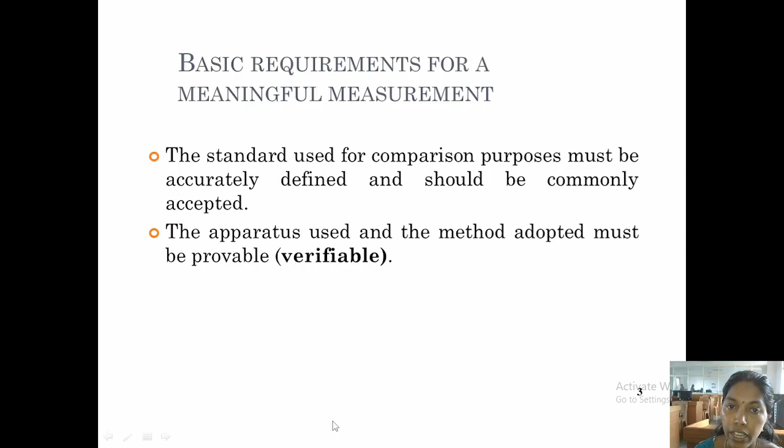The basic requirement for the meaningful measurement is we have one standard and the method to acquire the value. The two things are there. The standard should be commonly accepted and accurately defined. That is the main requirement for the standard. And for the method to acquire the particular value, the method we use to get the value should be acceptable and provable. That is very, very important.

Why we need this measurement? Why we are very interested in measurement and instrumentation? The main objective of the engineering domain is designing equipment to get the system done a particular job, or controlling some process so that we get the maximum of yield. For all these objectives, we need some values.

We need the status of the system, or we need what is the current performance, so that we can design, we can understand the system, and we can introduce a certain new modification so that the system will perform as we required. So the measurement is irrespective of any domain. The measurement and instrumentation is very common to all the engineering disciplines.

Okay, what are the methods we used for the measurement? To measure, we use the direct method and indirect method. The direct method is we want to measure a current. We measure a current directly. If we measure a current directly, and the current is the thing we want to measure as well, then this is a direct method. In indirect method, we want to measure a strain, but we measure a resistance change, or we measure a voltage change, and then we convert to the strain. Then it is called the indirect method.

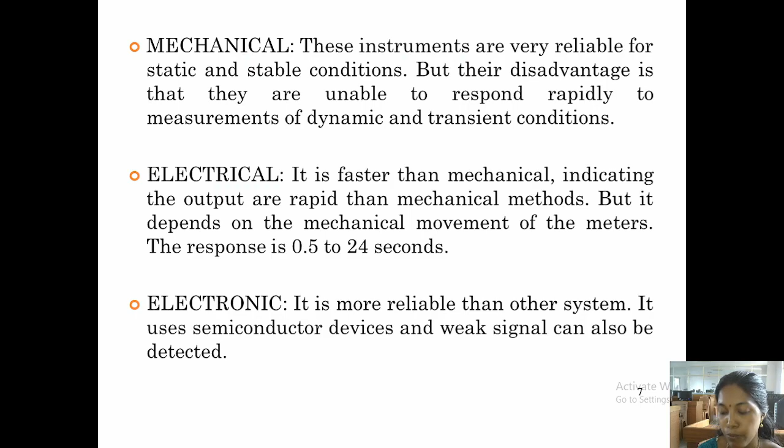Okay. Also, the instruments are classified into absolute instrument and secondary instrument. The absolute instruments give the magnitude of the quantity under the measurement in terms of physical constants of the instrument. While in case of secondary instrument, these instruments are calibrated by comparison with the absolute instrument which has already been calibrated.

Okay. Then next, depending on the functions of instrument, the measuring systems are classified into three. They are indicating function, recording function, controlling function. If in a room we have a thermometer which indicates the current temperature of the room, then that device comes under the indicating function. Also the clock, which is an indicating instrument, shows the current time, nothing else. These devices come under indicating function.

The recording function: say, for example, the energy meter in our home. They indicate the value as well as record the value, so that we can measure how much electricity we have consumed. The third type of instruments have a controlling function. They are used to provide the value for the actuating devices.

Next, based on the pointer movement, the instruments are classified as deflection type instruments and null type instruments. In a null type instrument, when we get the correct value or when we get the balance, the pointer comes to the zero position. In a deflection type instrument, it shows the value of the quantity we want to measure.

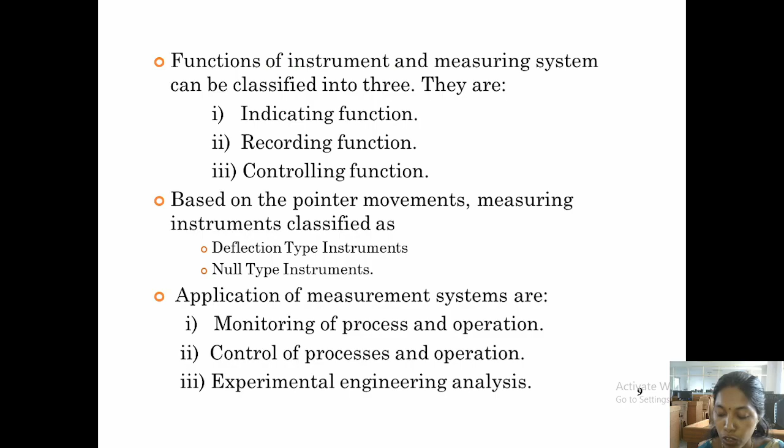The applications of measurement systems are: they are used to monitor processes and operations, they control processes, and they are also used for experimental engineering analysis. In experimental engineering analysis, if a parameter is very new to us, or new engineering concepts are evolving, the measuring instruments also evolve for that particular purpose; they come under experimental engineering analysis.

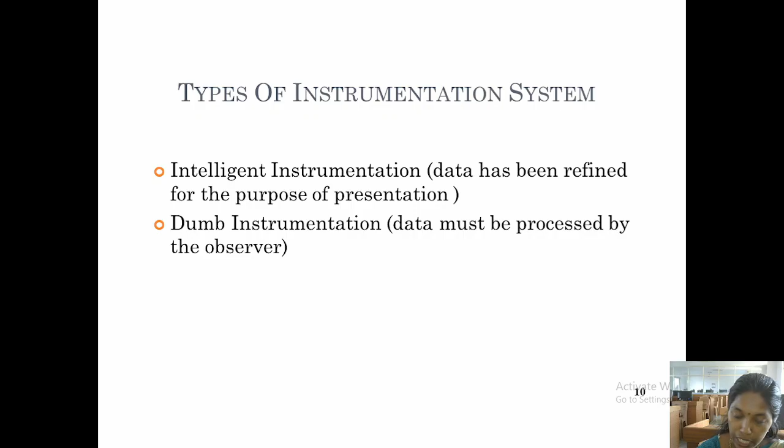The instrumentation system is further classified, based on applicability and purpose, as intelligent instruments and dumb instruments. In an intelligent instrument, the data we are acquiring is refined for the purpose of presentation itself. The device itself presents the data in the manner we want. In a dumb instrument, the instrument only provides the data to the observer. The observer has to prepare his or her presentation, because the data are very raw.

A very important understanding of the instrumentation system comes with its block diagram. For all measuring instruments, these 5 functional blocks are either merged or separately available. First, the primary sensing element is the most important element in the measurement system. This part detects the signal or senses the variable we want to measure. After the primary sensing element comes the variable conversion element. Next is the variable manipulation element, the data transmission element, and the data presentation element.

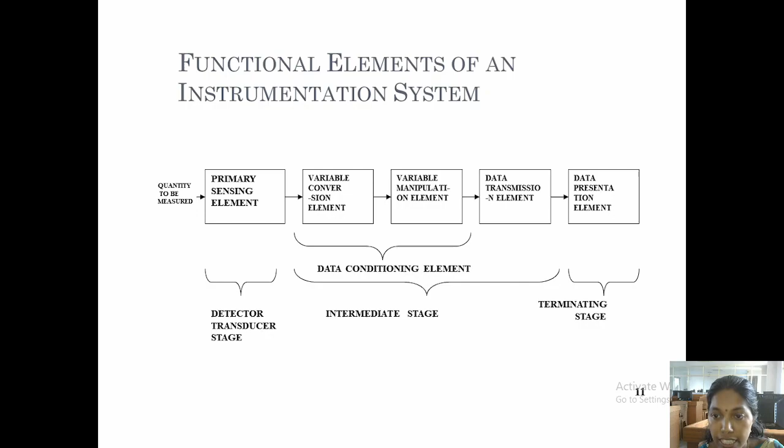These 5 elements are classified into 3 stages. First, the primary sensing element is the detector and transducer stage. Variable conversion, variable manipulation, and data transmission elements come under the intermediate stage, and the data presentation element is the terminating stage. First, the primary sensing element: the quantity under measurement makes its first contact with the primary sensing element. It's the initial stage, like a reception.

Next, the variable conversion element. It converts the output of the primary sensing element into a suitable form while preserving the information in the original form. In the data presentation element, the data is presented so that the observer can understand the overall process or the requirement of the observer. The requirement of the observer is met by the data presentation element.

If the observer wants to know the current status, then the data presentation element shows the current status only. If the observer wants to see the history of a particular value, then the data presentation element will be a chart or graph, so that we can see how the variable changes, and vice versa.

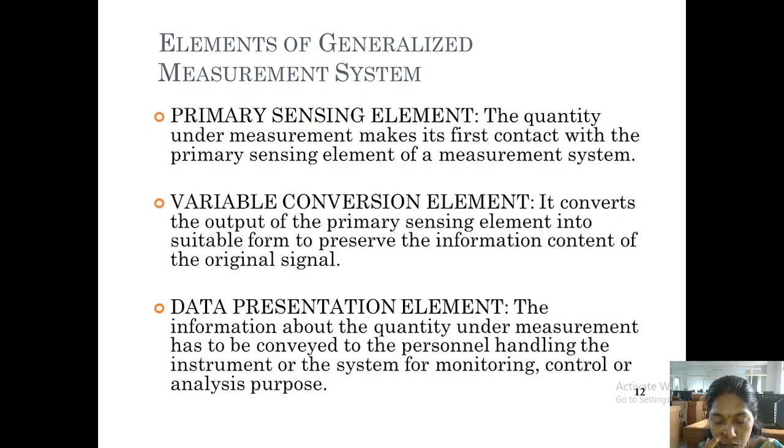Next, these instruments have some static and dynamic characteristics. Examples of static characteristics are accuracy, drift, dead zone, static error, sensitivity, reproducibility, static correction, scale range, scale span, noise, dead time, hysteresis, and linearity. One by one we will see them next.

Accuracy. It is the closeness with which the instrument reading approaches the true value of the quantity being measured. Accuracy is mostly expressed in terms of error. So accuracy is how close the value gets to the true value. If the device is very accurate, the actual value gets displayed in the instrument. When we get a very accurate device, we get the actual result.

Accuracy is defined in terms of error, as we mentioned. It has a true value. True value means the actual value of the quantity we want to measure present at a particular instant. How is the true value measured? The true value is mostly determined theoretically. The next is sensitivity. Sensitivity is defined as the ratio of output response to input.

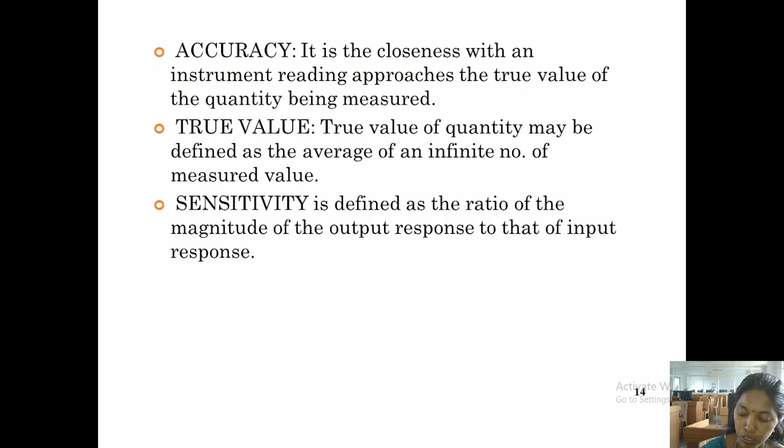Next is static error. Error is the difference between measured value and true value. Here Am is the measured quantity at the particular instant, and At is the true value of the quantity at the particular instant. When we define error in this way, it is called absolute static error.

Next, in measuring instruments, we see the scale range. Scale range is, in a display or digital instrument, the minimum value it can show and the maximum value it can show. For example, in a digital meter with 3 digit spaces, what is the minimum value it can express? It can express 000 as the minimum value, and the maximum value will be 999.

Next, scale span. Scale span is the difference between the maximum value it can show and the minimum value. In the above example, the maximum value is 999 and the minimum value is 000. What is the scale span? Scale span is 999 minus 0, which is 999. Next, the term reproducibility.

Reproducibility is specified in terms of scale reading over a given period of time. The next is drift. Drift is an undesirable quantity in an instrument, because if we have drift, before we start using the instrument we have to adjust the drift, or we have to account for the drift already in the instrument. Drift is of 3 types: zero drift, span drift, and zonal drift.

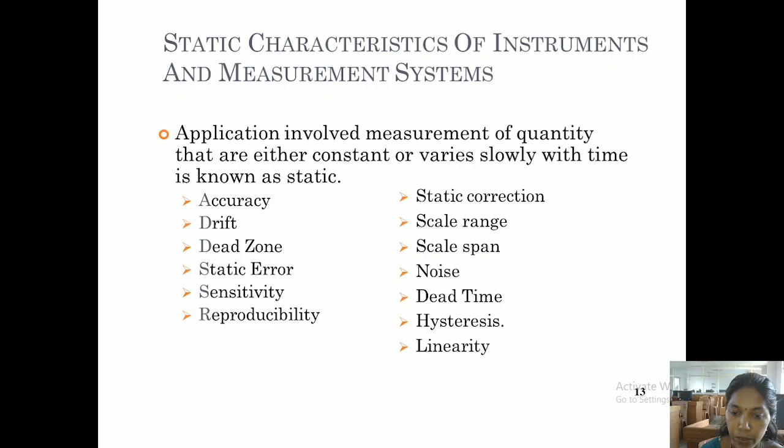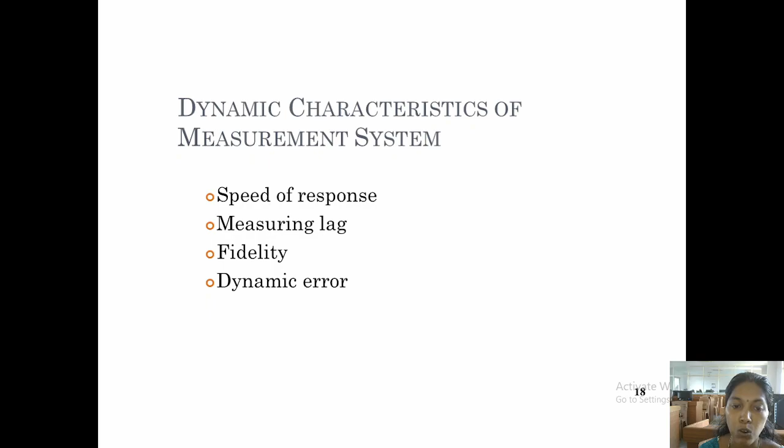Okay, the dynamic characteristics of the measurement system. We have seen the static characteristics of the measurement system. They are accuracy, drift, dead zone, static error, sensitivity, reproducibility, and other terms we have discussed. In dynamic characteristics come speed of response, measuring lag, fidelity, and dynamic error.

Speed of response: when we say the word dynamic, we have to understand that the parameter we want to measure is changing very frequently. The change in the parameter is very fast. So speed of response is very important when we are making a dynamic measurement. It is defined as the rapidity with which a measurement system responds to the change in the measured quantity. It is one of the dynamic characteristics of the measurement system.

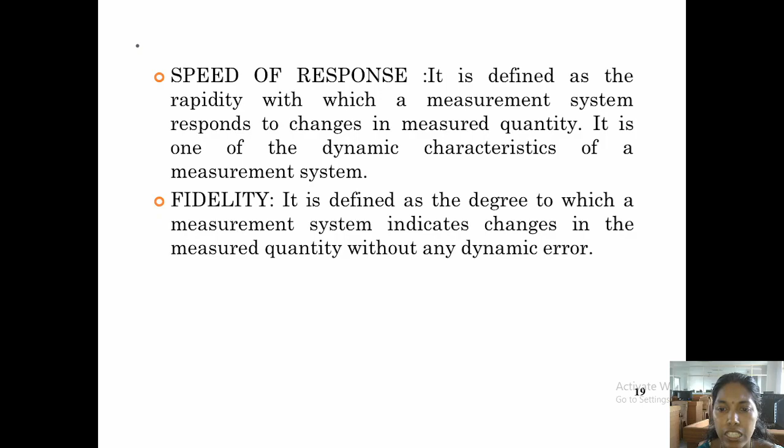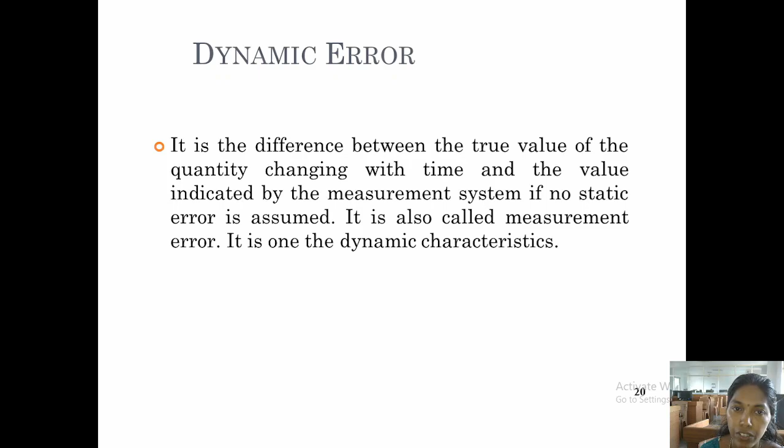Next is fidelity. It is the degree to which the measurement system indicates the change without error. The dynamic error is actually error, but when we measure a dynamic parameter, the error is termed dynamic error. The next is measurement lag or measuring lag. It is the retardation or delay in the response of the measurement system to changes in its measured quantity. There are two types, retardation type and time delay.

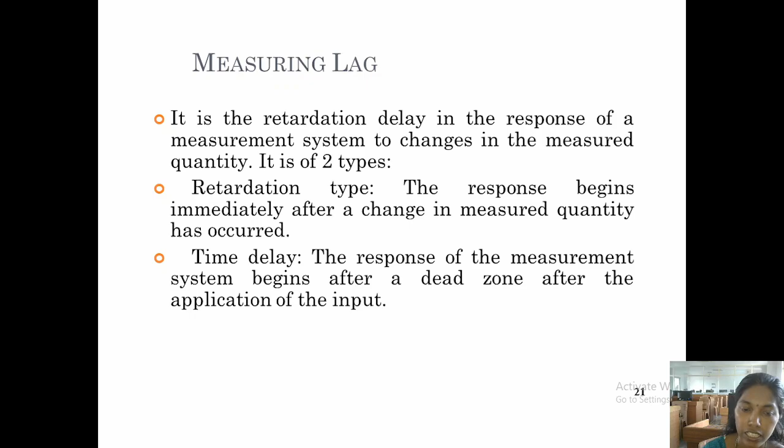Okay, it's very important to understand the measurement system. What are the types of error that can occur in a measurement? Errors are classified as gross error, systematic error, and random error. In systematic, there are three types of error: instrumental, environmental, and observational error. Gross error is simply a human mistake. We see some reading but we write some other reading. We see some reading, we say some other reading.

Say for example, I am measuring with a voltmeter and the digits are fluctuating in the least significant bit. Say it shows 1.05, 1.07, 1.08, 1.09, 1.1. Then the observer cannot say what the value is. He will say some middle ground. These errors come under gross error. What should have been done? He has to write all the values and take the average. That is the acceptable way of doing it. Otherwise, gross error occurs mainly because of human mistake.

The next type of error is systematic error. They are instrumental error, environmental error, and observational error. Instrumental errors are because of shortcomings of the instrument, misuse of the instrument, and the loading effect. These are the main three reasons for instrumental error. Next, environmental error is due to the conditions of the environment where we measure, for example temperature, pressure, humidity, EMF, dust, and other external factors.

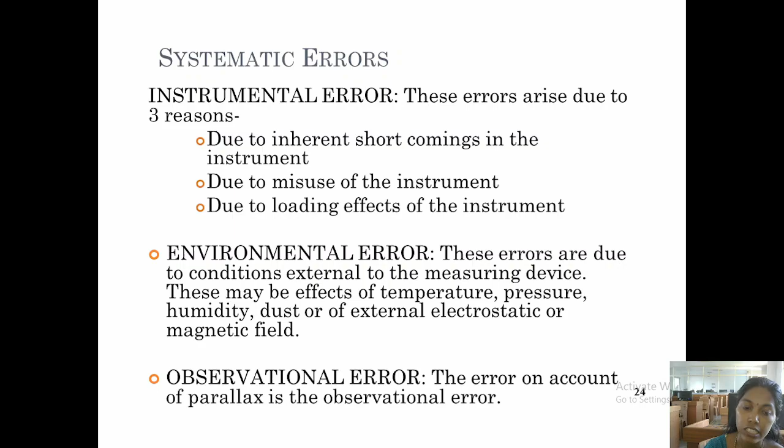For observational error, the observer should look perpendicular to the pointer. If he is seeing from another angle, he will see some other value. That is the parallax error. It is an example of observational error.

Next is a very important error. It's random error. We never know what the reason for the random error is. Or we might have guessed some reasons, but those reasons contribute very small factors, and many other reasons we never know of. Random error is caused by fluctuations; there are thousands of reasons, but each reason contributes very minimally. We cannot eliminate that error. That is the reality. So this is the random error.

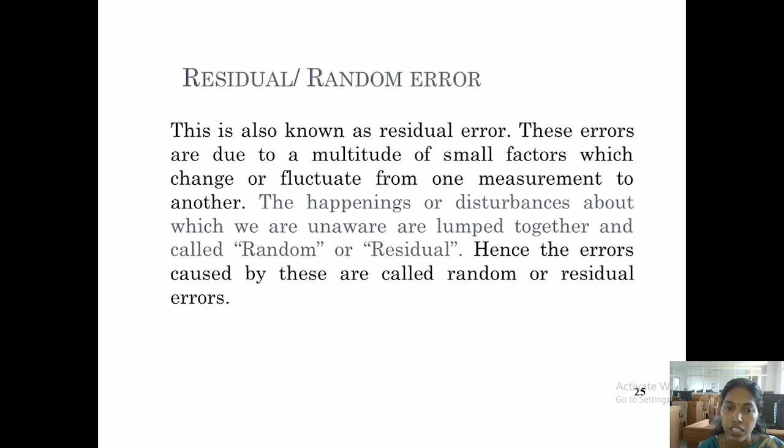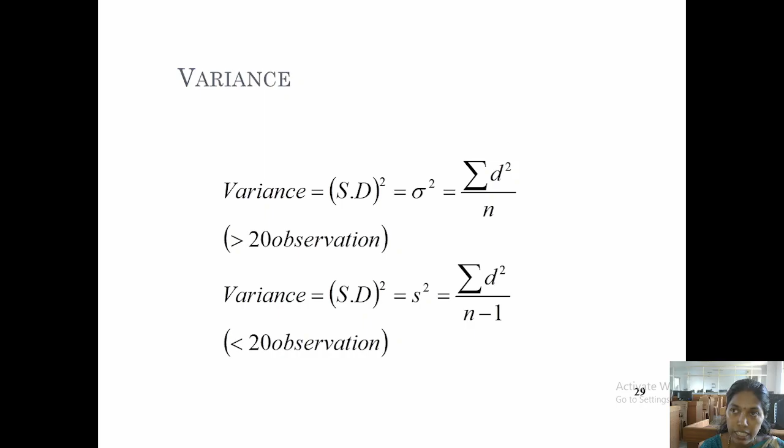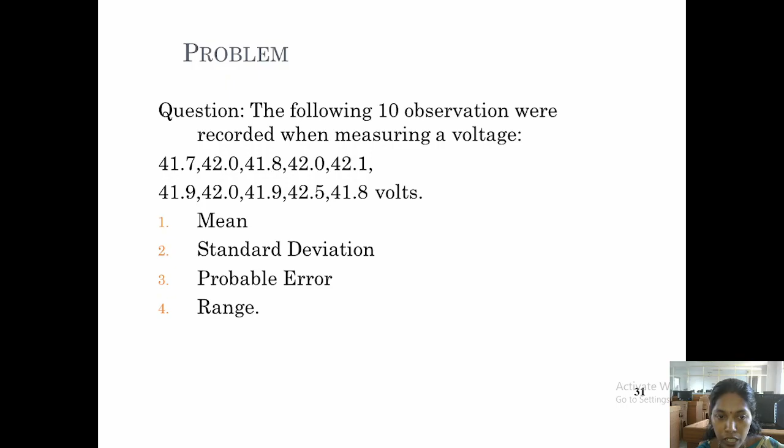How to reduce the random error? We take the arithmetic mean of the values, we find the deviation, the standard deviation, and we use variance to understand the random error in a measured value. Also we can find the probable error. This is one example. The observer makes 10 observations without changing the input. For a constant input or constant environment, the meter shows the following readings. We have to find the mean, standard deviation, probable error and range using these formulas.

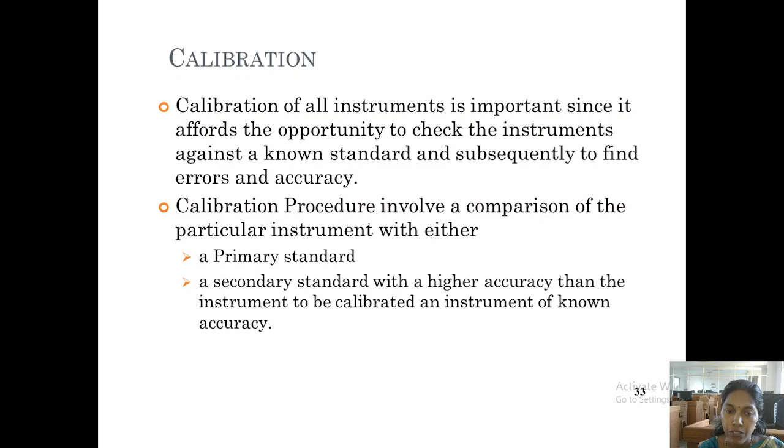Okay, the next important topic is calibration. Say we have designed a perfect instrument for measuring a certain value. Over a period of time, we cannot give assurance. So we have to check the meter against a standard. That is the process of calibration. The standard may be a primary standard or a secondary standard.

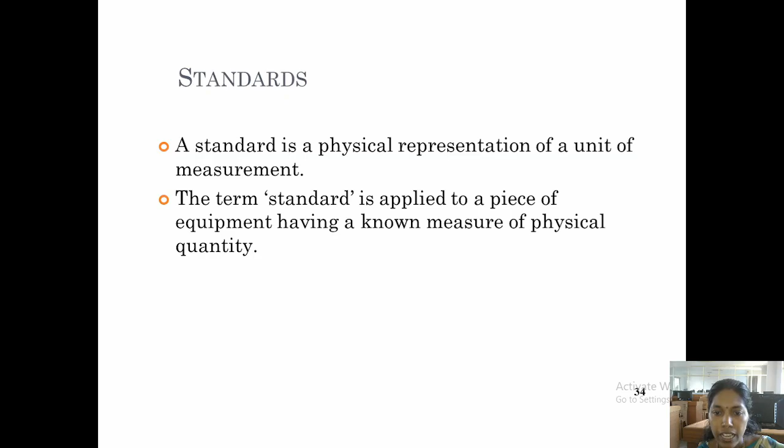What is the meaning of standard? A standard is a physical representation of a unit of measurement. Standard applies to a piece of equipment having a known measure of a physical quantity. A very accurate device is a standard device. There are 4 types of standard: international standard, primary standard, secondary standard and working standard. Normally working standards are used in a laboratory, secondary standards in industrial laboratories, and the primary standard is at the national level. International standards are used all over the world; they are the international standards of units.